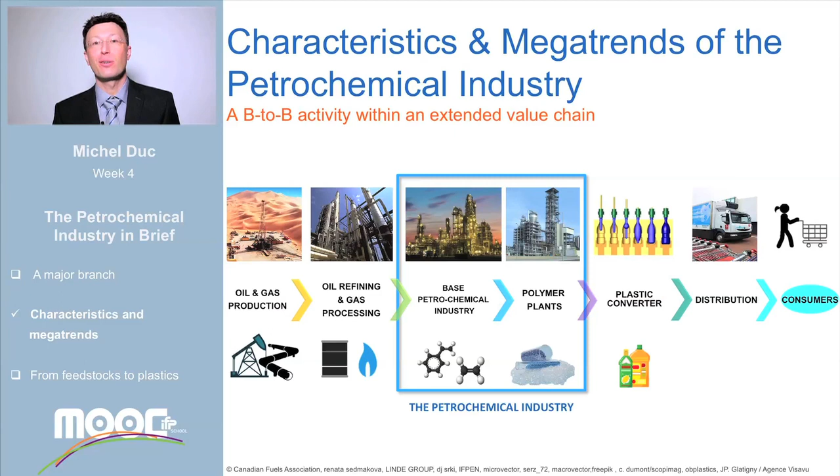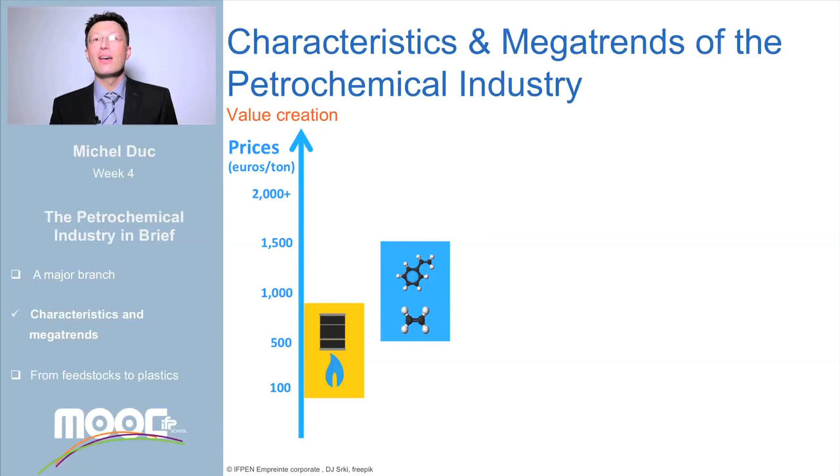Proceeding through the petrochemicals value chain, the value of the products progressively increases. Oil and gas are quoted on markets at around 100 to 800 euros per ton of oil equivalent. Base chemicals are typically traded at prices from 500 to 1,500 euros per metric ton. Commodity plastics and resins are generally commercialized at around 1,000 to 2,000 euros per ton. Final consumer goods can be even more expensive.

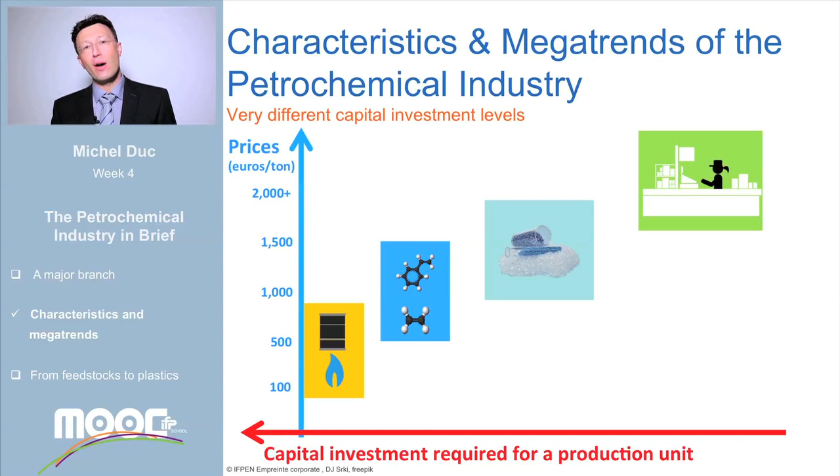The level of capital investment required to build a new production facility is very different for each of these industries. Very high for oil and gas exploitation and petrochemical production, much lower for the manufacturing of consumer goods. This is why there are only a few large companies producing oil and gas. A few more manufacture base chemicals. Substantially more companies are involved in the production of raw plastics and resins, whereas hundreds of thousands of smaller companies make the consumer end products.

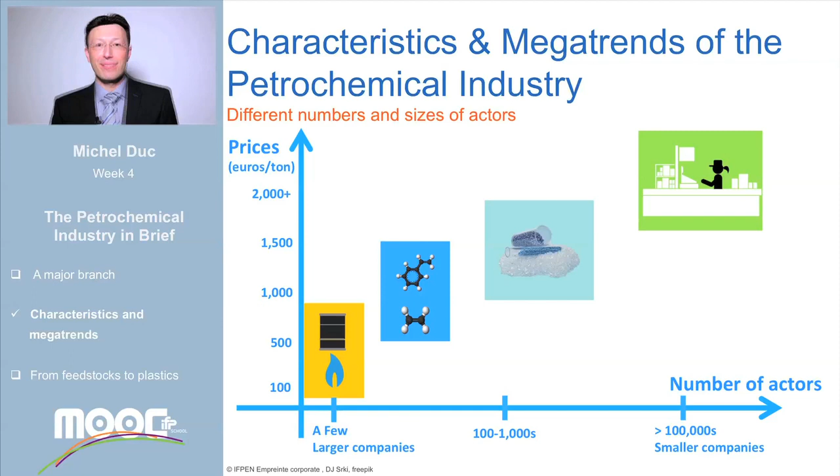Trading is a core activity at each step of the oil and gas to plastics value chain. Each step provides opportunities to buy, sell, exchange, or swap products to optimize chain cost and asset utilization.

Each region of the world has its own specificities in terms of economic outlook and ability to welcome investments in petrochemicals. Europe, North America, and Japan are homes to the historical petrochemical companies. North America is undergoing a rebirth of its petrochemical industry thanks to shale gas. In contrast, the European petrochemical industry is stagnant or under reorganization.

Saudi Arabia has developed a solid core petrochemical industry thanks to local access to cheap raw feedstocks. This country has become a major exporter of petrochemicals. China is still importing massive quantities of petrochemical intermediates. It benefits from large manufacturing infrastructures to make plastics and resins, locally converted into consumer goods that are re-exported worldwide.

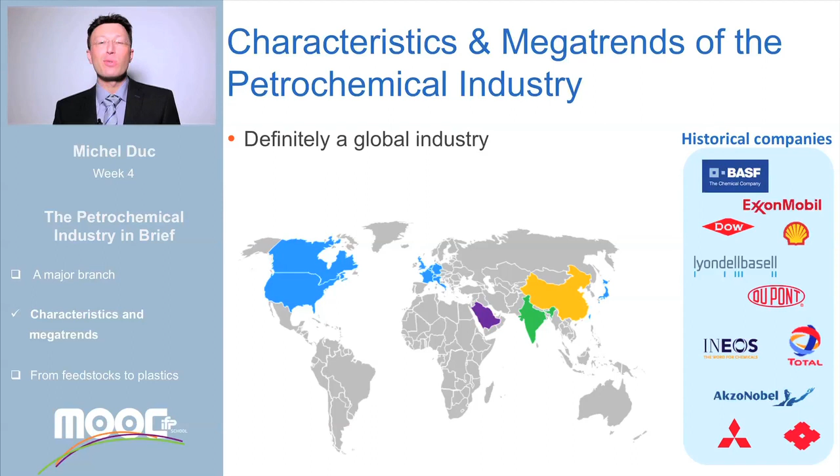India is becoming another actor in petrochemicals with a fast developing industry. The petrochemical industry is first and foremost a global industry, particularly with regard to the very active trading related to it. Among the historical companies, BASF was still the leading petrochemical company in 2014. New players belonging to the fast-growing emerging economies in Asia, such as Sinopec and Reliance Industries, have more recently joined the group of leading petrochemical companies.

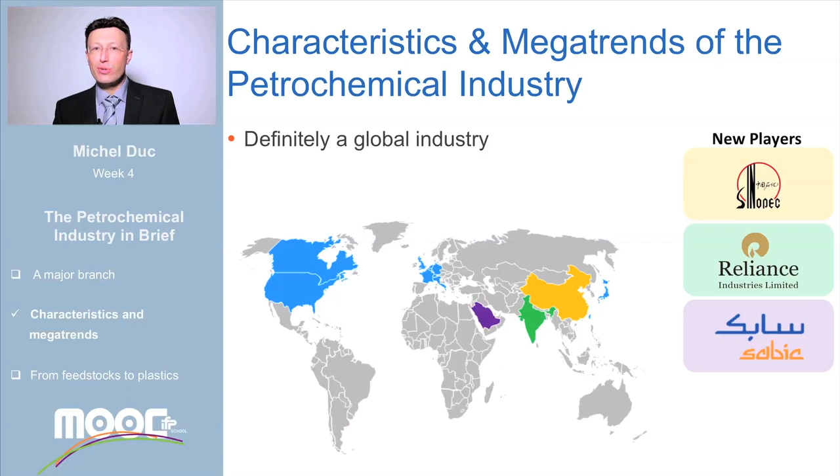Within the new players, new petrochemical companies have also emerged from countries benefiting from advantaged feedstocks such as SABIC. The growing capacity of the new players is partly due to the acquisition of activities from historical companies. Another characteristic of the petrochemical industry is that its products are manufactured mostly to common specifications, especially for base chemicals. This guarantees to all the purchasers of petrochemicals the same characteristics and properties from one country to another, in line with the global nature of this industry.

The manufacturing technologies are available from existing petrochemical producers and engineering companies. They are being continuously improved and can be acquired by purchasing licenses. The design and construction of petrochemical manufacturing plants require, however, massive capital investments. As feedstocks and energy costs are high and product prices generally set by the market, the only way to make a good profit margin is to build large-scale production facilities and play on economies of scale.

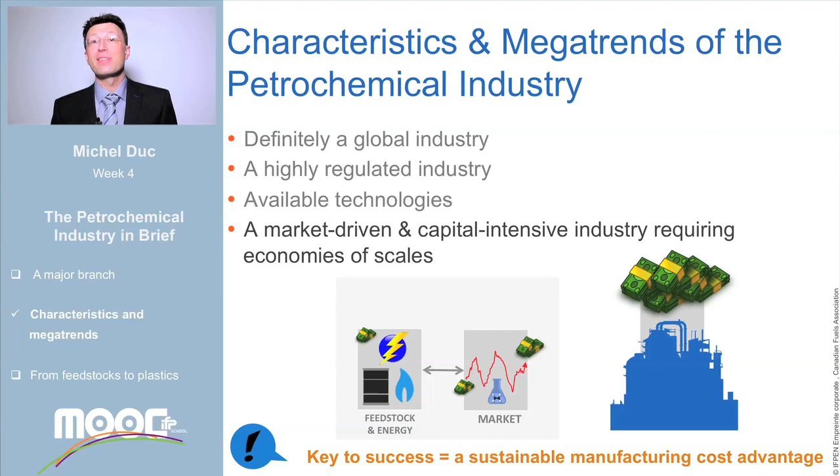We have seen that petrochemicals are mainly sourced from oil and gas and that their production is energy intensive. The fraction of oil and gas effectively consumed by the petrochemical industry remains, however, modest compared to the fraction used for transportation fuels and residential heating. Less than 10% of crude oil and 3% of natural gas consumed annually is used to manufacture petrochemicals.

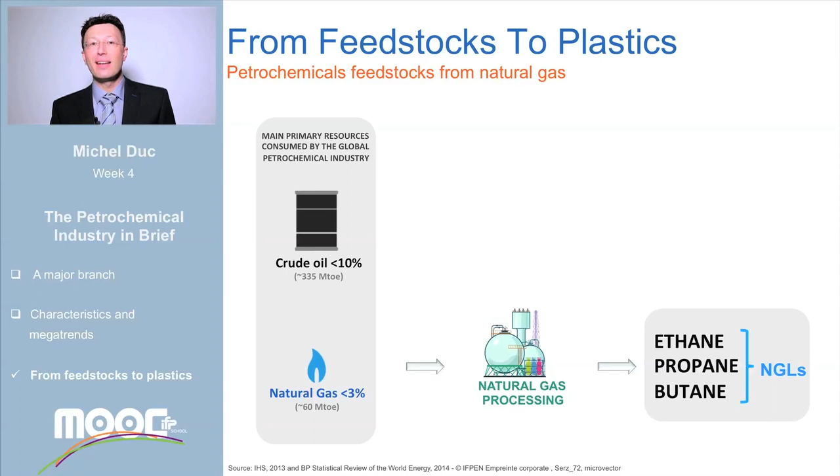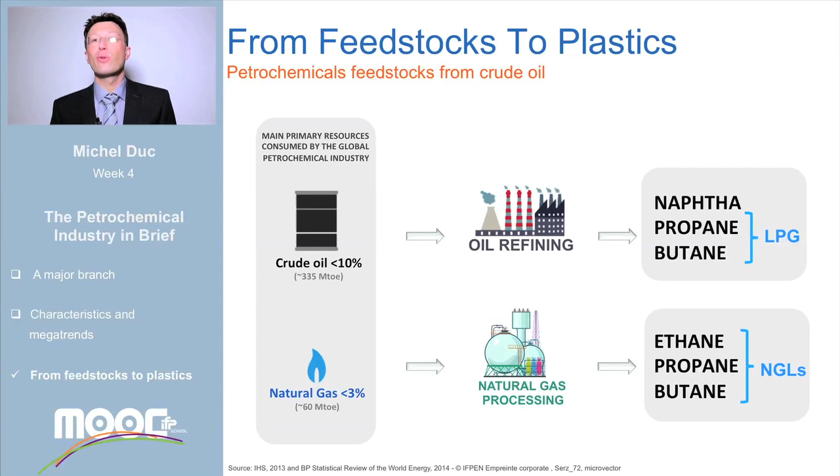The main basic feedstocks of petrochemical platforms are natural gas liquids consisting of ethane, propane, and butane coming from natural gas processing units, and byproduct cuts of oil refineries such as naphtha and mixed butane and propane, also called liquefied petroleum gas or LPG. The petrochemical platforms convert these feedstocks first into the so-called olefin and aromatic intermediates.

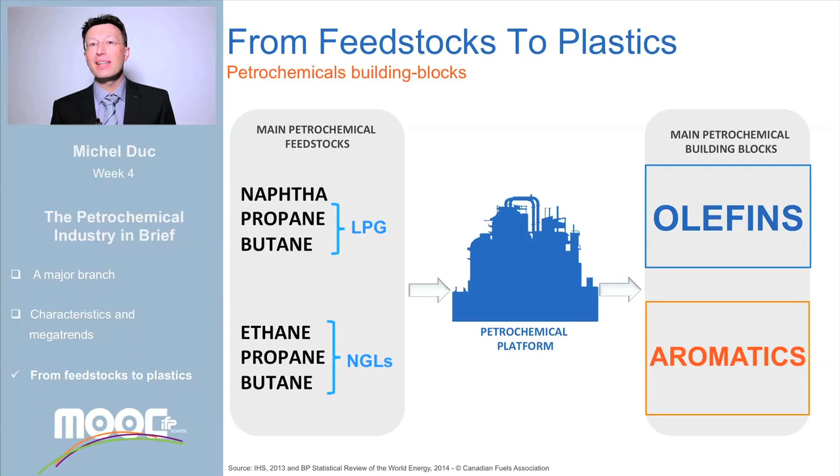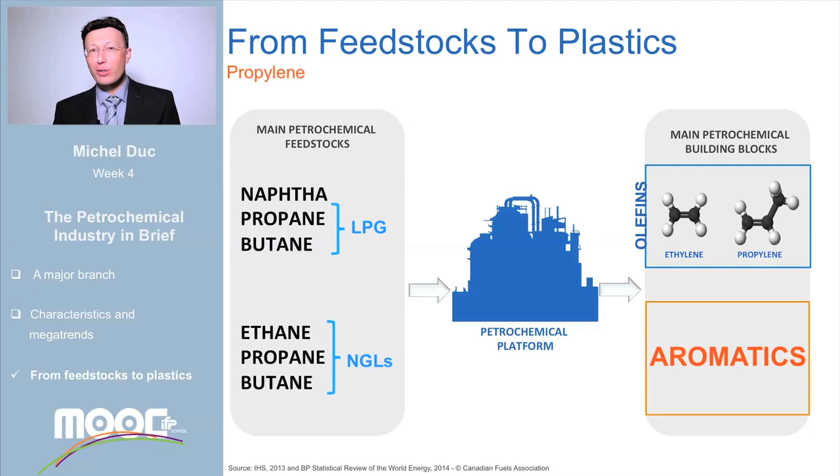Ethylene is a major petrochemical intermediate. This is the smallest building block. Ethylene represents over half of the total base chemical production volumes. Propylene is often a side product of ethylene production. Aromatics form the second main group of building blocks in volume. They consist basically of BTX: benzene, toluene, and xylenes.

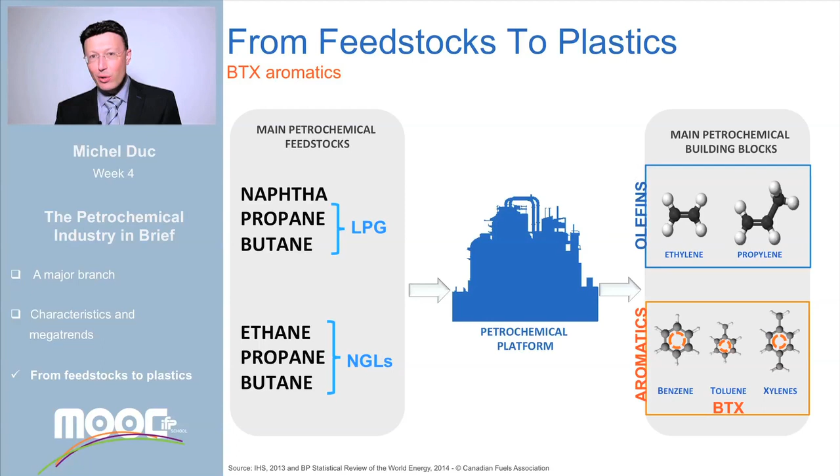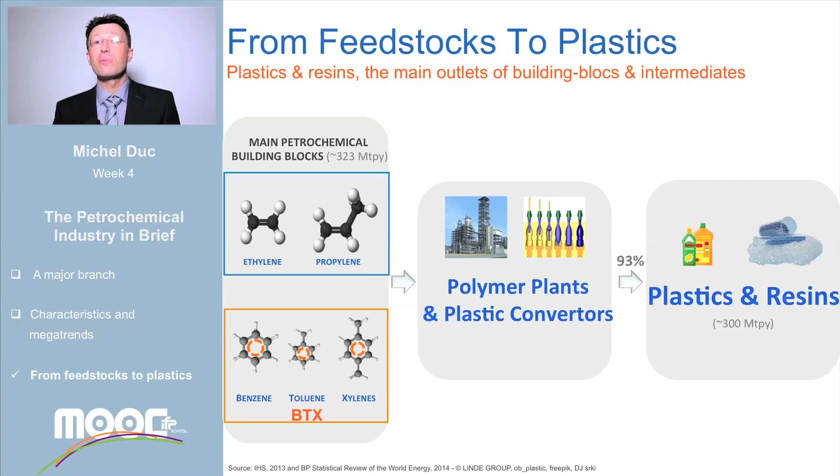The final purpose of all these petrochemical intermediates is mostly to manufacture large commodity plastics and resins, as shown by their respective annual production tonnages. Ethylene can afterwards be converted into lightweight plastics called polyethylenes, or it can be chemically transformed after further steps into polyvinyl chloride, PVC, a plastic material encountered in the building industry. In the same way, propylene can be used to make polypropylene, a versatile plastic.

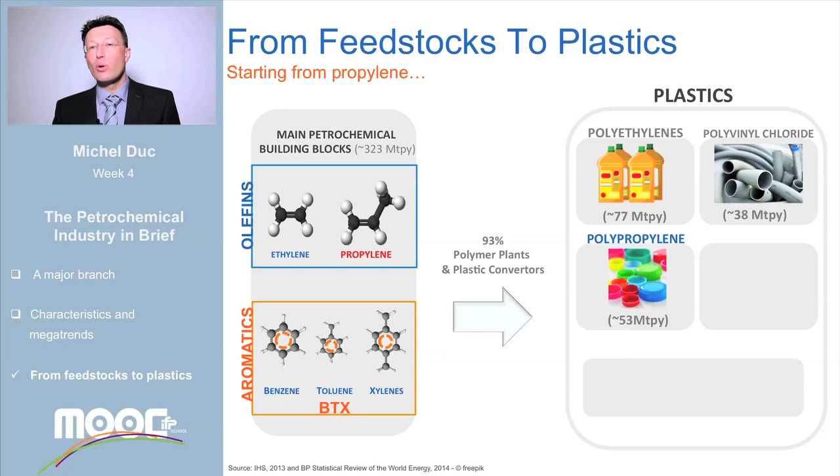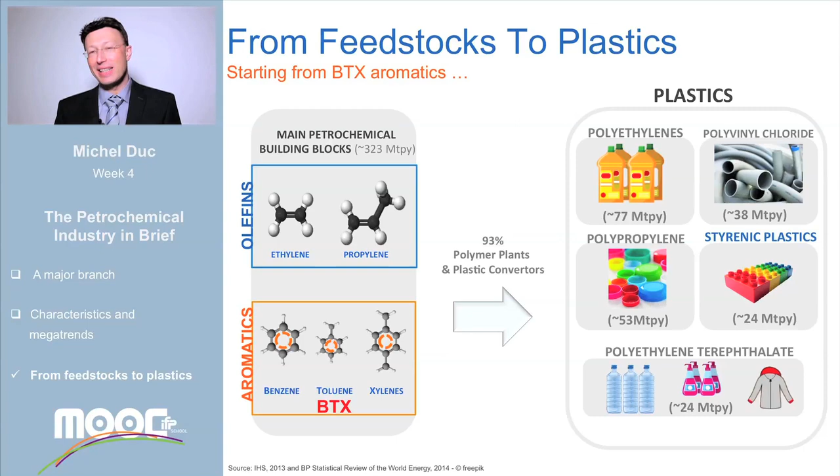Aromatic intermediates require further chemical modifications so as to be, in turn, possibly converted into useful plastics and resins. One of these plastics, polyethylene terephthalate, PET, is often the material of choice to make water and carbonated beverage bottles. In the same way, some aromatic source plastics, such as polystyrene, are used to make dairy food packagings, building insulation boards, or consumer electronic casings. Well, I think I have given you enough to think about for today.

I will have the pleasure of giving you a deeper insight into the manufacturing of petrochemical intermediates in the next course.